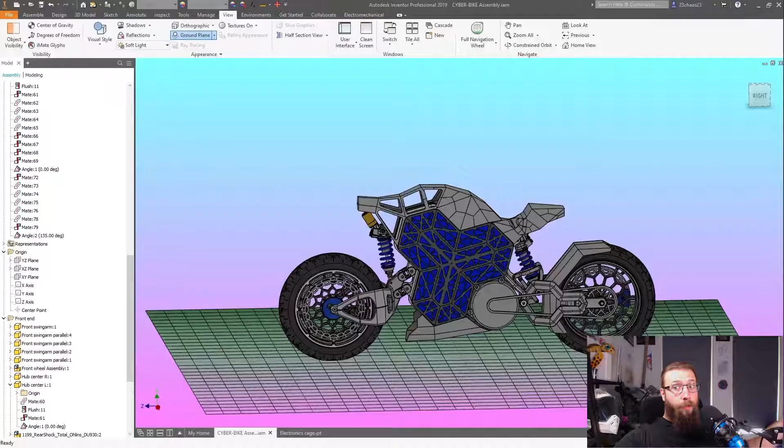So, voiceover time, but with face cam. Yeah, get yourself comfortable, I have. We're going to be here a while. This is a lot of footage to go through.

I'm doing this voiceover a little bit differently. Normally I do it inside of Premiere Pro - there's a little button where you push record voiceover, and it lets you record the voiceover over the footage. But because this is so long, and it's a bit awkward using the Premiere Pro voiceover tool, I'm just doing it this way. I've got the video playing in front of me on the big screen in VLC, and then I'm recording at the same time with the face cam.

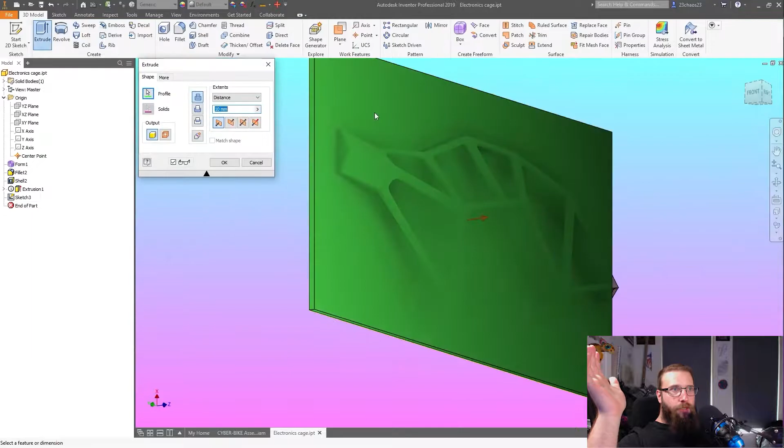We'll just go through it. This was start of last week, Monday I think. This was one of the live streams that I started. The weekend before, I was on hiatus basically for 2 weeks between the last episode and this episode, and then there was a week this last week where I was working.

Over the weekend, for the previous 2 weeks, I've been trying to work out where to take the bike aesthetically, and work some other stuff out with the steering geometry. That took 2 weeks basically, among other things.

Then over the weekend, I came up with an idea, and I created a new concept sketch for it with more detail, used my pens. Got a fancy new drawing desk there that my mum bought me for Christmas behind me, and that's a really nice drafting table, drawing desk type thing. So I put it to use, made a new concept art drawing.

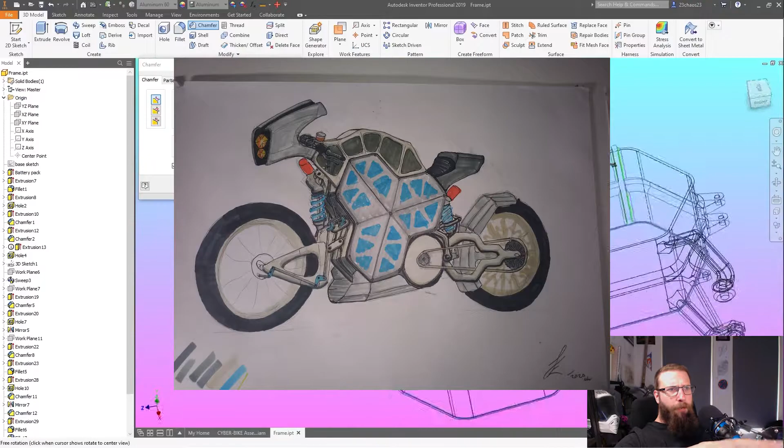You'll see it pop up somewhere in here - there'll be an image of it - and I'm just using that now as a reference for how I'm going to make this thing styled aesthetically.

So I've taken that form that I had over the frame as to represent the tank, and I've basically tessellated it. I've cut a whole bunch out, and now I've gone through the frame you just saw before, and created these bolting points around the top of the frame.

Now I'm just going to create the corresponding bolts in that tessellation. I'm calling it the electronics cage, because basically that whole section there, the tank section, is where all the electronics and motor control systems are going to be for the bike if you actually built it, because there's plenty of room in there.

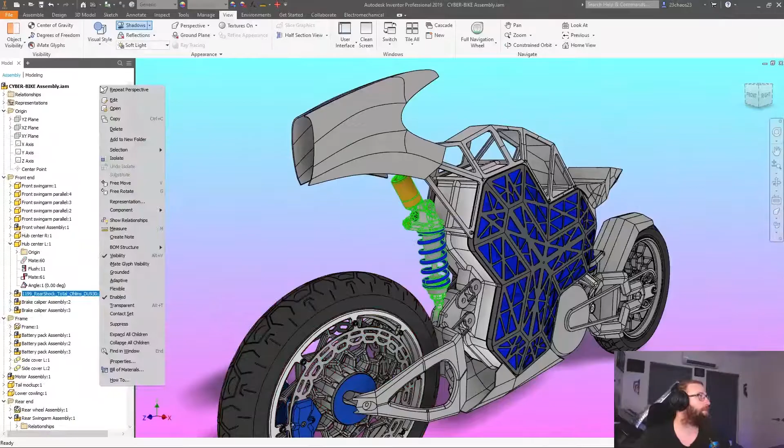This live streaming was fun. I really enjoyed this live streaming. It'll be nice when there's a few more people in the chat. At the moment, I've been sitting there for hours talking to myself, which is loads of fun.

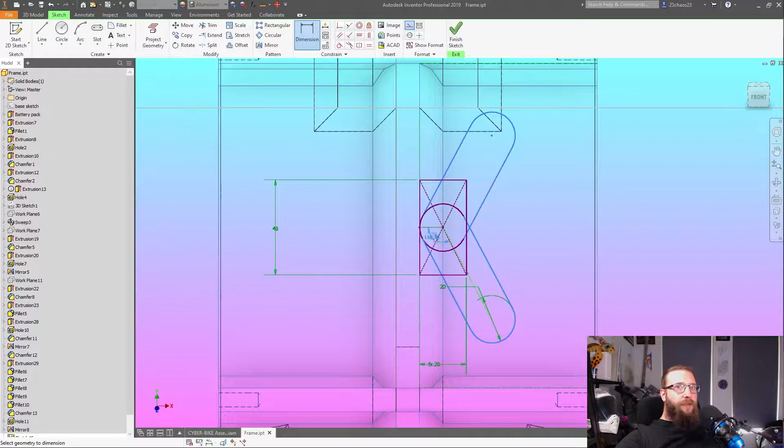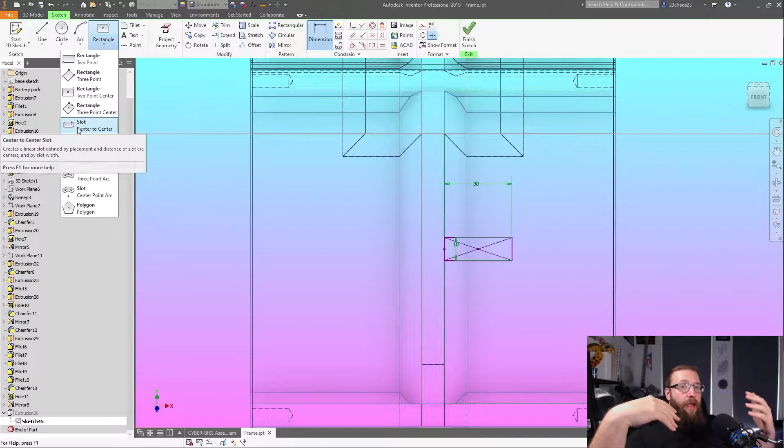What I'm doing here is creating the mounting point for the front suspension, the front shock strut. I need to create an area where the front suspension attaches to, and I don't want it attaching directly to the frame. Same as on the back of the bike, you don't want that sort of thing attaching directly to the frame. You want an intermediate part. If the bike is ever in an accident or a crash, it's easier to replace that section of connective material than it is to replace the entire bike frame.

On the back you've got all those extra linkages, and now on the front here there's an additional strut section so that if there's impact that forces through the strut of the shock, it doesn't apply those forces directly to the frame. There's an intermediate strut section, and that's what I'm creating here. This is the mounting point for it, and then we'll move on to creating that strut. This is it here.

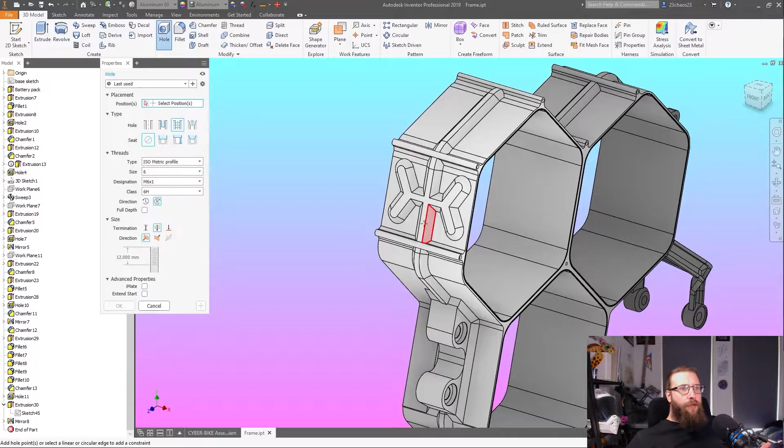Kept it nice and simple, playing around with different tools throughout this whole project, just trying to up my CAD design skills, playing with the different tools, seeing what shapes and designs I can make.

Here I'm using a lot of loft tools and generative design tools after working on the front swing arm. I found that for the rest of this it's going to be easier to use those generative design tools. And I said this in a previous video, don't use the generative design tools too much. You fall into the trap of not working that stuff out for yourself. But in this case I'm trying to work out ways to utilize it in creative ways.

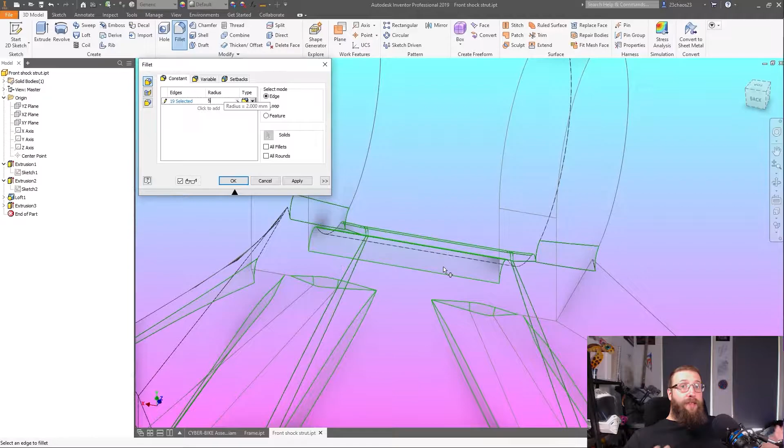So not just letting it determine what's happening, but using it as a tool, like it's intended to be used, and then using that to inform different options I had. I've already got ideas of how I want to do something in mind, and I'm using that to inform me on what the structural aspects of it will be and what directions I can and can't take. So that narrows down the choices I've made in my mind of what I want to do.

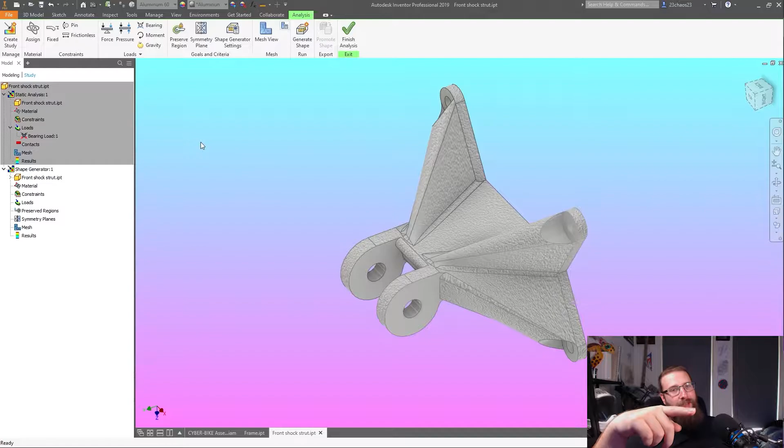You can see here, I'm just doing the stress analysis test. This is way overbuilt, this piece. I ran the stress analysis test before I hog out all the material in it. I'm putting over a ton of force into this thing, and it's not deforming. There's barely any stress deformation whatsoever.

It was a beast. So here you can see the generative tool saying, yeah, just hog all this shit out the middle, and there's going to be so much material taken out of it, and that's basically what I did. Come through here, I've adjusted the profile of the two mounting points, which is the mount to the shock and the mount to the frame, and changed the way the loft function works between those profiles.

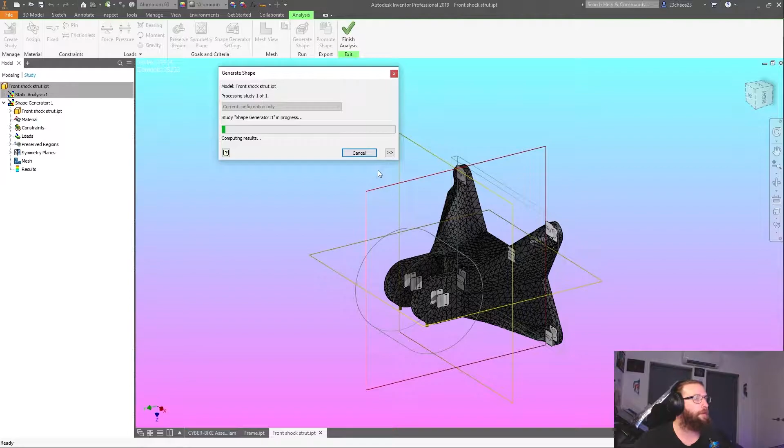See the quick turntable there, how much it actually told me to take off. I didn't want to go that extreme with the material removal, so I've included an extra strut there in the middle, as you'll see now, just to - I mean, it's still way over engineered. Like the amount of force this thing is capable of handling is nuts, because it's basically a 4-pointed triangular trestle.

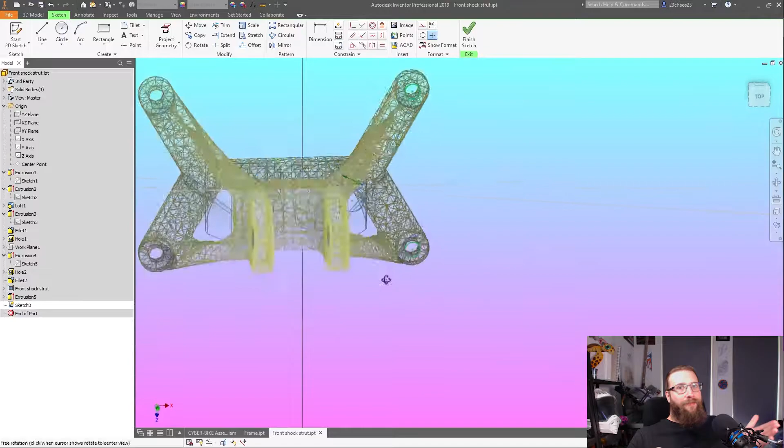They built the Eiffel Tower using a 4-point triangulated trestle system. They're fucking strong, okay? They build those guy wire towers with 4-pointed triangular trestle systems. They've got proper names, but I make up my own names for stuff because I'm a self-taught engineer. I didn't learn all the proper names, but I understand the concepts of how some of this stuff works.

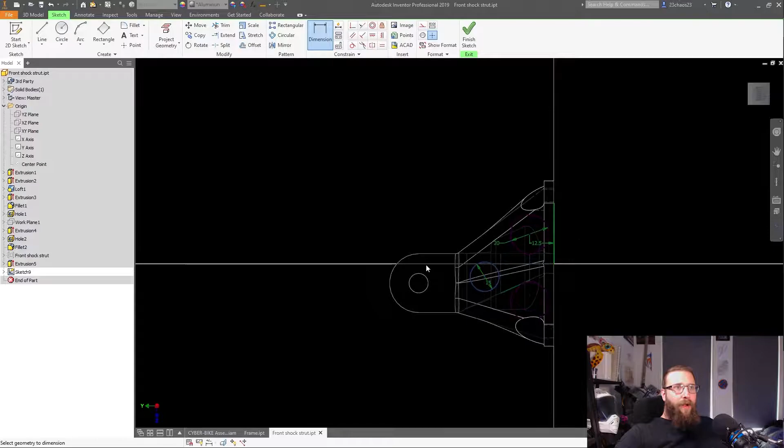So I've hogged out a bunch of material there, and I've just added these fillets in, and I'm not happy with it. This is one of the reasons why I don't like using the generative design tool, because it tells you this is the material you remove, and then you have to sit there and figure out how to CAD that material removal in, and quite often you end up with sharp edges or almost impossible to machine shapes. So practicality...

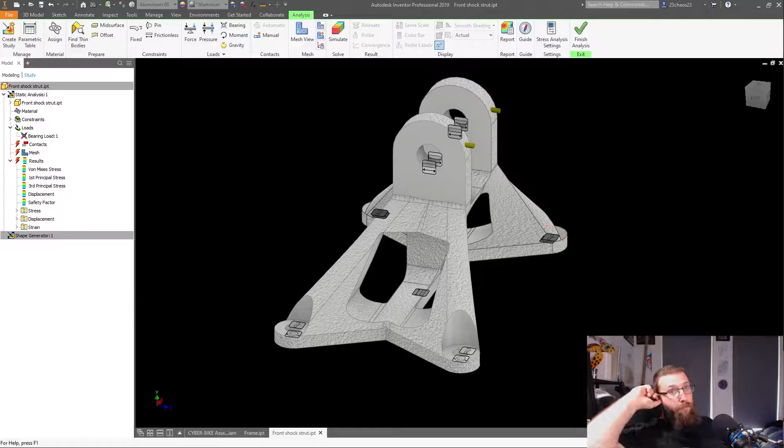Yeah, it's not something that's easy to make, and that's generally the problem you run into. I eventually found a happy medium between if it were manufactured - like it would be a cast piece and then it would be machined. So most of the parts on this bike I've designed so that it starts as a die cast part, and then there's some machining processes to remove material and to clean up reference faces and holes and stuff, threaded holes and stuff like that.

And just here, adjusting the overall position so that everything lines up nicely.

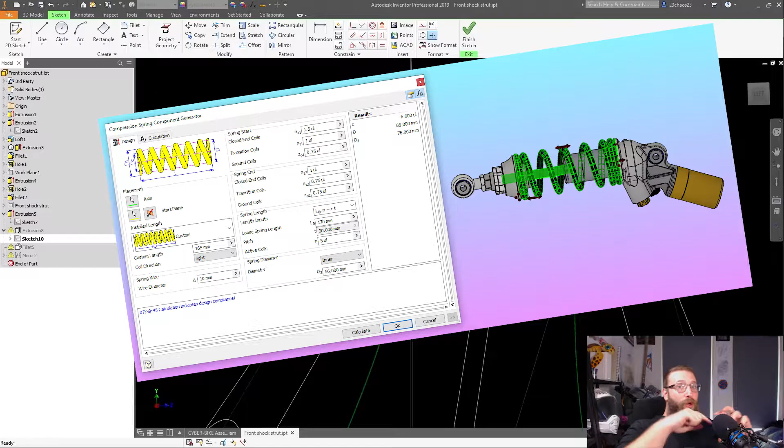Now, if you notice on the spring of the shock, the model I downloaded from GrabCAD has a graphical error in the spring profile, it's not filled in properly. I got fed up with this at some stage, so I went into that file, deleted the spring, and used the spring tool in CAD that lets you do generative design springs based on what forces you want, how much it's allowed to move, how many coils you want, how you want the ends to look, how thick you want your wire. There's all these options and you can tune it. I replaced the spring and it's a lot better now.

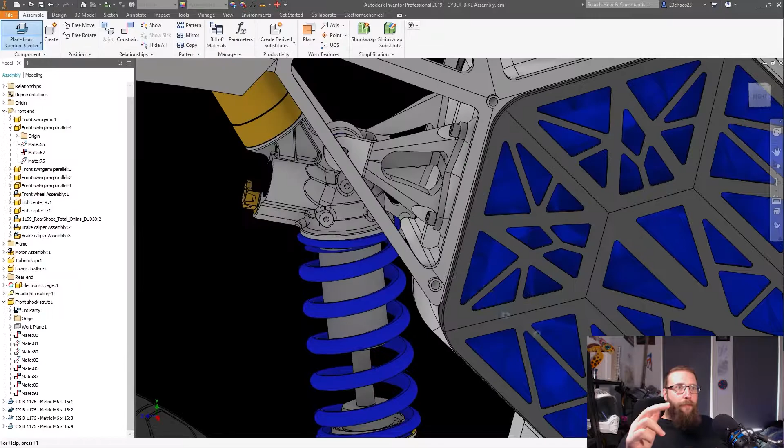I've got control over it now, so I can see what it looks like with the spring compressed. I just open up that dialog box and change the value of the length of the spring, and it updates the spring geometry and compresses the whole spring because I've got the surfaces mated to the geometry of the spring, so it automatically updates. That's really handy compared to before, when it was just a fixed model and I couldn't change anything.

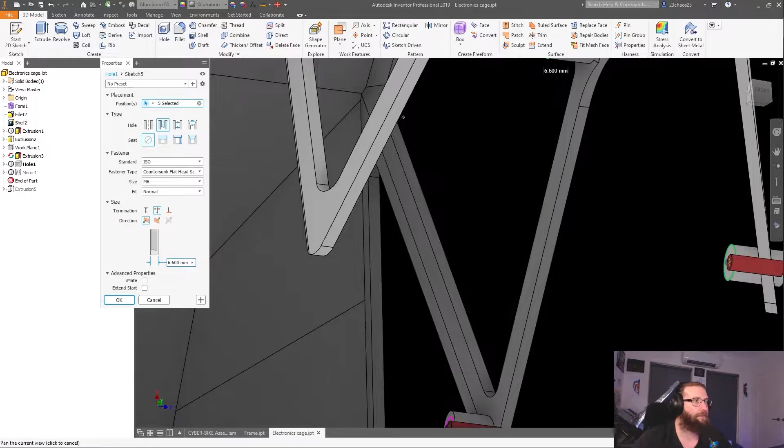You can see there I'm going through this list on the side. Quite often when I'm working, I'll look at the other options in drop-down menus, because you'll find a lot of information in there. One of the things I noticed was there was a screw option, a flathead cheese screw, I think it was.

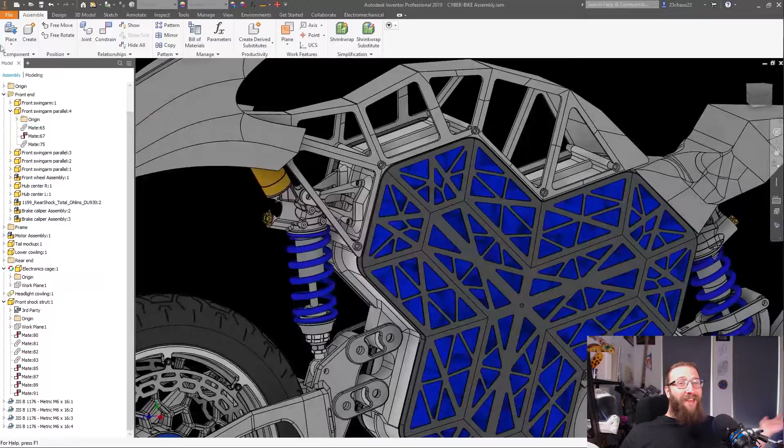It had the word cheese in it, and I was like, what the fuck screw is this? So I went and Googled it. Just a regular flathead screw fastener, flathead bolt, but apparently they call it a cheese screw. So yeah, I learned something new there. There's quite a few of those throughout the week that I've come across, where I'll be looking at a name of something in a drop-down box and I'm like, what the fuck is that? So I just bring up Google and look it up.

A lot of the stuff you do is like that. You just have to be curious. Don't just be focused on the thing you're doing. If you see something you don't know, you don't have to do this for everything, but while you're working and you spot something and go, oh, what is that, just be curious about it. Go look it up, take that like 20 seconds to look it up.

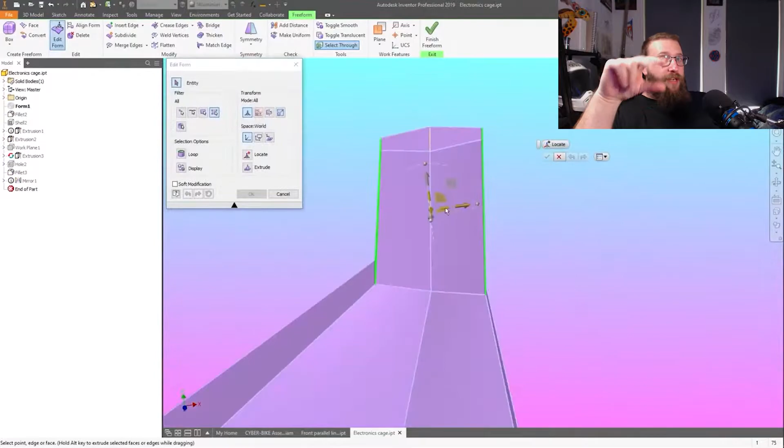So here I'm cleaning up the geometry I used to make the trestles, because I've changed the shape of the front end of the trestle, where I'm now going to start working on the headstock, which is basically the thing that the handlebars connect to. In order to do that, I had to change a couple of things and go back and update, and then update other things because the way I had it designed wasn't very good.

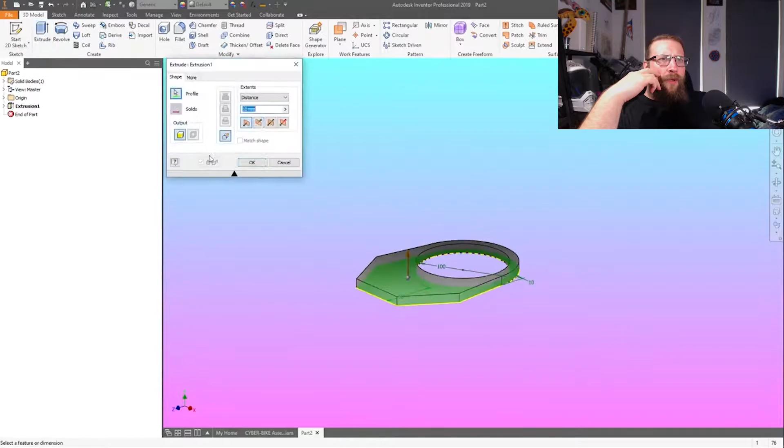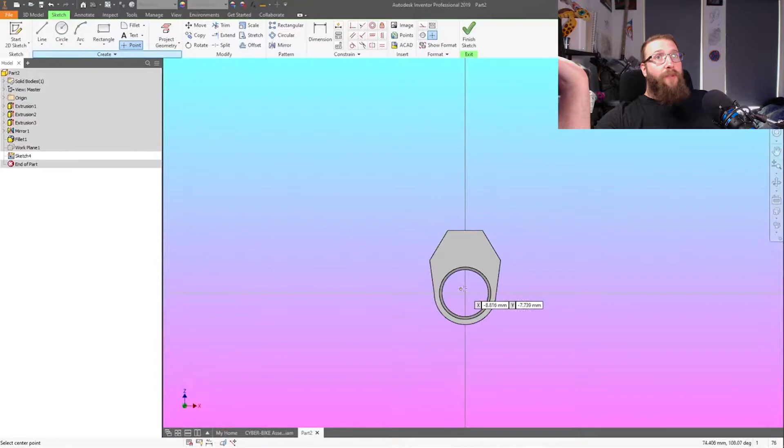Now I've moved the view of my face cam around, because in the live stream one of them I had it down the bottom, and then the other one, like this one, I had it up top. Don't ask me why I changed it. I think it was covering something up, and I wanted to not cover that thing up, so I had it up top for that live stream. Oh yeah, that's right, this live stream I think I was going to do some video editing on stream, and we never ended up doing that. Or was that this later one? It was a later one. I can't remember what the reason was, there was a reason for why that's up there, or why I'm up here now. I'm covering it up with this cat. Here, have a look at it. Yeah, see?

So all of this footage you're seeing is sped up by 15 times. I could go to 20, but it gets a little harder to track and follow what it is I'm doing on screen.

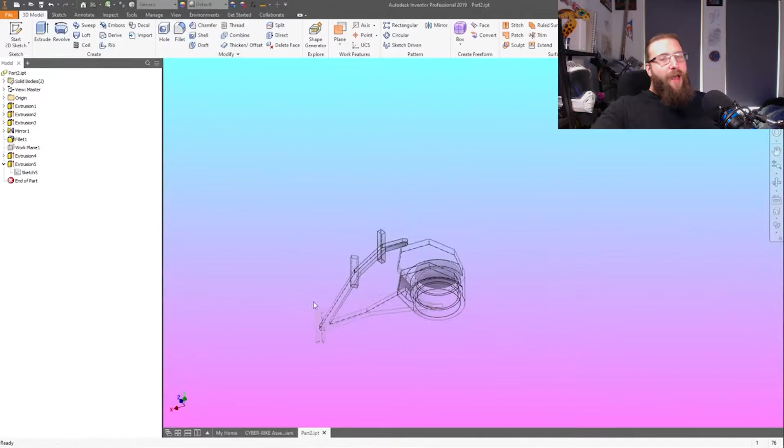15 I found is the maximum I can push this, because I work quite fast myself in real time. If you come watch the stream for a while and see how I work, I'm very snappy with it. It's like these FPS players, MOBA players, they've got this twitch reaction with their mouses. I don't play a lot of games, so this is my kung fu. This is where I get fast. This is where I get good.

To then go and do a time lapse on my footage, there's only a maximum limit of how much I can speed it up before it just becomes a blur of unrecognizable stuff. I'm working on the handlebars here.

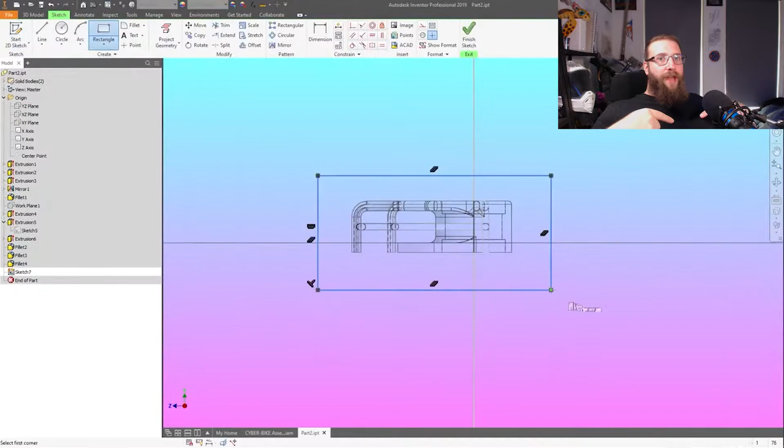Now this is one of the big things, how did I want the handlebars to look? There's very little functional constraint to it, because it's not like a regular motorcycle with shocks, where you've got actual forces of the front wheel traveling up through the shocks into the headstock and then into the frame. The handlebar on this is purely for the rider and for control of the steering. There's no actual proper force feedback coming back from the wheel. There is a bit from the steering geometry, but we don't have the amount of forces because we don't have suspension traveling through the handlebars.

So I wasn't as limited with the design constraints on this, so I was like, let's go a bit more aesthetic with this. And that's one of the things I did in that concept sketch, that drawing — I'll put a picture up here for you — to make something more aesthetic.

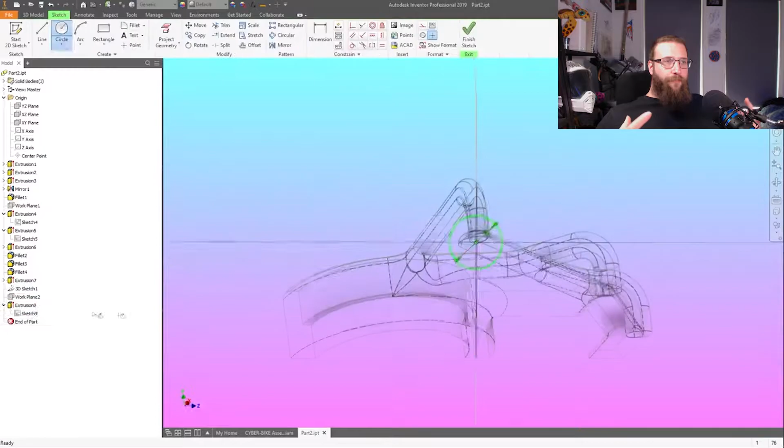It's only a very slight little part of the image where you see it. You have to look at it quite close, it's only a very small detail. But it was enough of a small detail for me to develop in my mind the full frame of the design from that seed. It blossomed into this whole idea, and it turned out really well. I quite like it, I'm quite happy with it.

It started out really chunky, it would have been like this. But I got it down to like this and still kept that sort of chunky feel to it. I wanted that whole cage sort of look on it, and it turned out really nice.

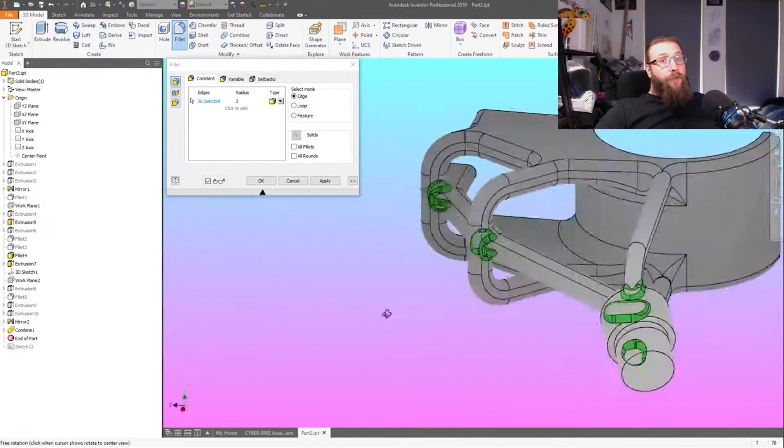I'm very happy with pretty much all of the work I've done on this bike so far. It's turned out really well, better than I expected. With most of the things that I sit and design, I always feel that pride in my work, and that's why I do it, because you have to have pride like a craftsman in what you do. You just got to find that passion and work with that passion to do what you're doing.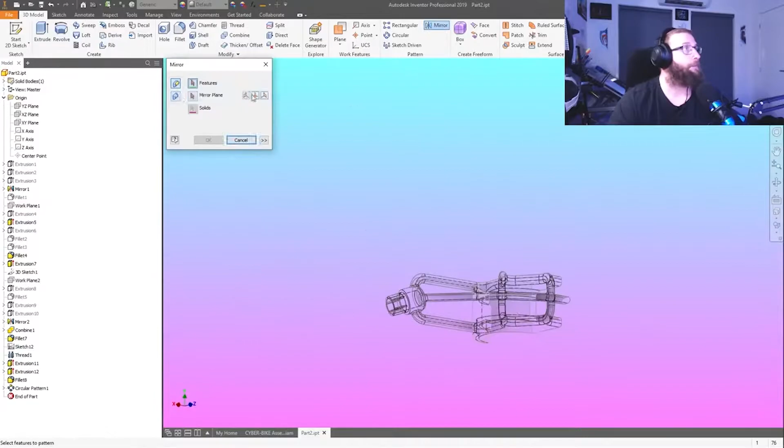You see here, look how fucking chunky it is. It's ridiculous. It's what happens when you're working in a window with something by itself and you're sort of freestyling what you're doing, and then you pull it into the rest of the assembly with everything else. You go, oh shit, I wasn't paying attention to my sizes and my dimensions. It's a bit like, ooh, I should change that.

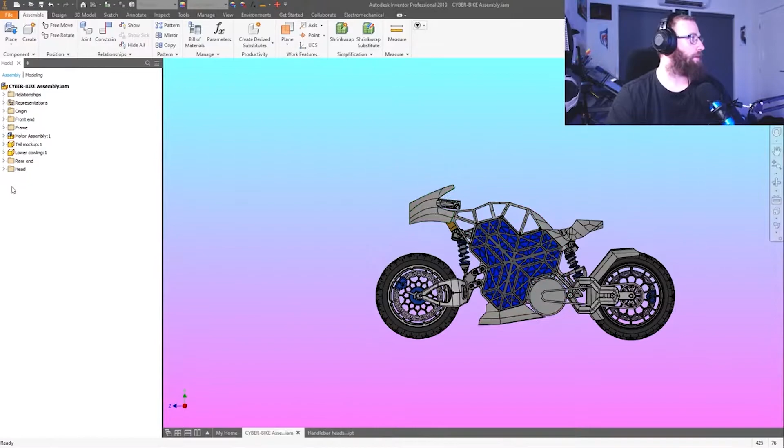There, see there? I'm adjusting the spring size. Surprised I didn't get footage of me actually doing that, changing that spring out. But the new spring looks good, much better than the old spring. Spin me right around, yeah.

And then I had to go back and change something here again, update stuff. I had to fiddle with that electronics cage quite a few times, it kept giving me grief. I spent quite a bit of time here just fixing stuff, getting it to fit nicely, especially for the headstock and the way that it all attached to everything.

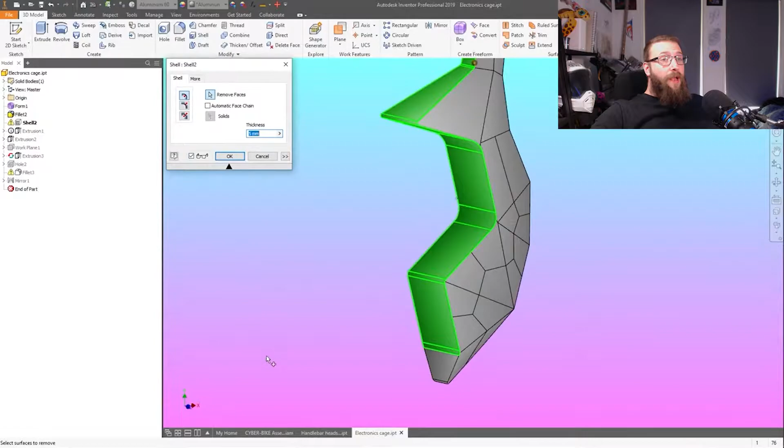I saw a lot more new people showing up just to see what was going on. I think YouTube has a different algorithm for showing up on people's feeds, for lives, like people looking at what's live — I think it's got a higher chance of showing up for people. So I'm going to do that more often. I see a lot more traffic into that. I mean, they don't all stay, they're there for like a few minutes to see what the hell's going on. And there's just this weird guy sitting there talking to himself because there's nobody else watching. There's like 1 viewer count, 2 viewer count.

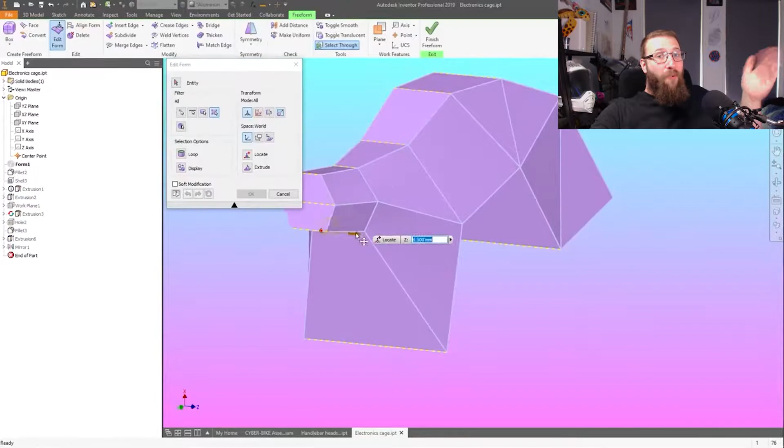I'm quite happy to sit there by myself and talk to myself for 3-4 hours. I did one stream that was almost 9 hours with a break in the middle somewhere. Whew, that was a long day. That's why this whole video is so long.

This is the final episode of the Cyberbike. I can't believe it, a complete project. This is a first on the Chaos YouTube channel. I don't think I've ever completed anything on this channel. There used to be a lot more videos here, but I've unlisted them because they were proper garbage.

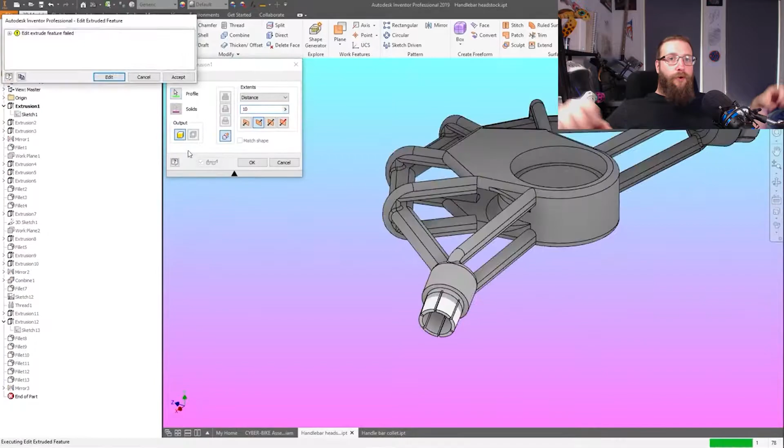I decided to go with a collet chuck type deal for the handlebars. So the handlebar comes to a certain point, and then there's a pipe that you pop into it and tighten it down, and your grip, controls and everything go onto that pipe. So if you drop the bike and bend or damage the ends of the bars, you don't have to replace the whole assembly, just the ends.

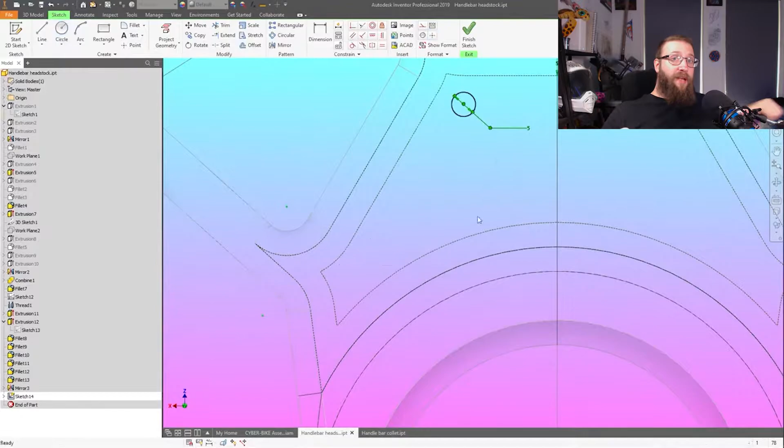This is another design feature that's quite common in some bikes. Most bikes actually just have a pipe as a separate part - you can drop the bike, that bends, and you just replace that side of the handlebars. Dirt bikes are a bit different, but most of the stuff on a dirt bike is designed to come off easily and be replaced easily.

The whole handlebar section on a dirt bike is cheap - I bought one for my dirt bike once and it was like $16. They're so cheap, and then all the parts that go onto them are designed so that when there's a crash, they rotate around the bar and push out of the way so they don't actually damage or bend. It's just your grips, the brake levers - yeah, those things.

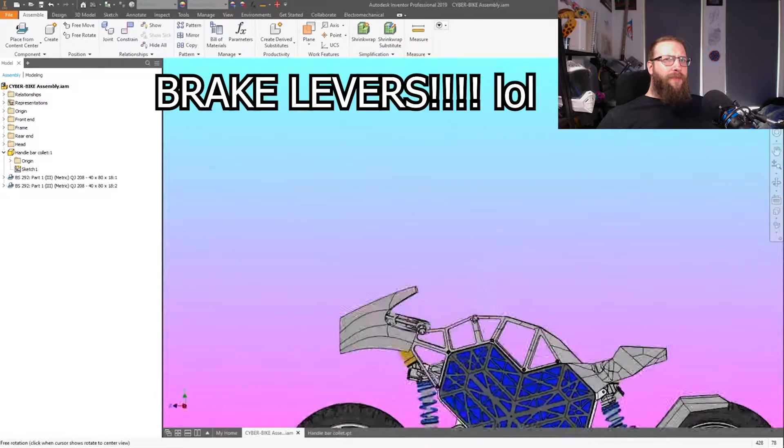So I'm just designing up the collet that goes on there to tighten those tines up. I was quite happy with the way this turned out - I just sort of freestyled it. This whole handlebar segment, just on stream, all in one go, freestyled it. I didn't have any proper drawings or anything, it was all just ideas in my head. See how it turns out, play around with it - yeah, it was a lot of fun.

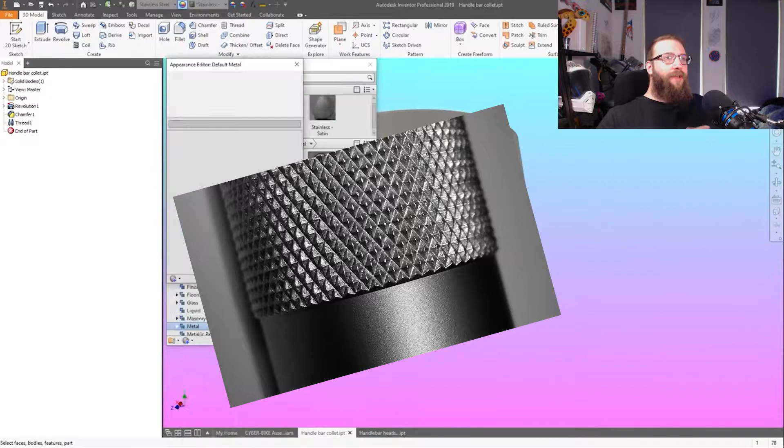This was interesting - I knew the Autodesk Materials Library has a knurled pattern, like you get knurling on stuff, and I put it on there but the pattern was huge. So I had to duplicate the texture and change the scaling of it so that when applied it looked good. I work in technical sketch illustration most of the time, so I'm not sure why I bother applying realistic textures to things - I suppose it's for the beauty shots or close-ups, when you turn on realistic rendering you get to see all the different texture profiles.

Oh, that was another thing - when did we miss that? I don't think I recorded that.

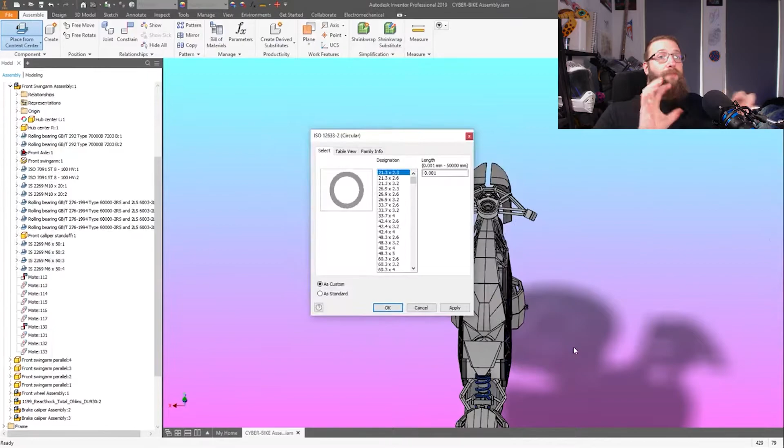I remade the front axle that goes in the hub-centered steering, and instead of making it all as one piece like the previous one, I decided to play around with the welding tools in Autodesk Inventor. You can create an assembly file that is a weldment file, assemble your individual parts like normal, but then almost like in a regular part file you add the fillets for the welds and put in all the information - what kind of weld it is, how deep the bead is, whether it's a penetrating weld or just cosmetic - there's all those features you can add.

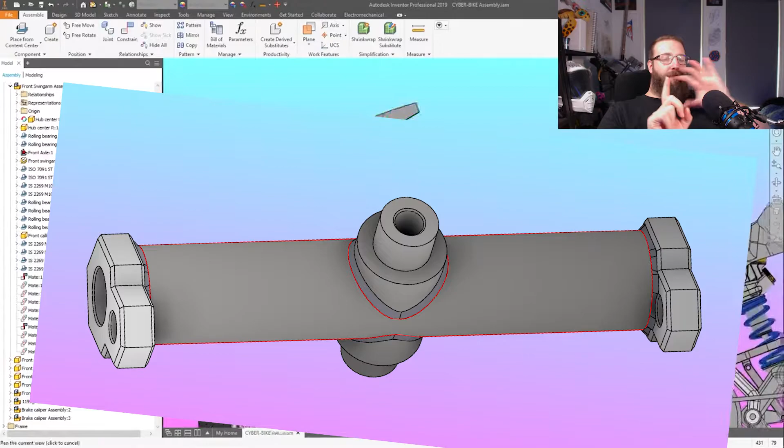So I created the whole axle section - basically the headstock for the rake angle is a solid cylinder with threading on top and bottom to capture the bearings, and then there's a hollow pipe with a cutout through the middle that the cylinder pops into, with welds around the top and bottom. On the ends I made two machined steel end caps that fit into the swing arm - you pop them in and put a weld bead around those.

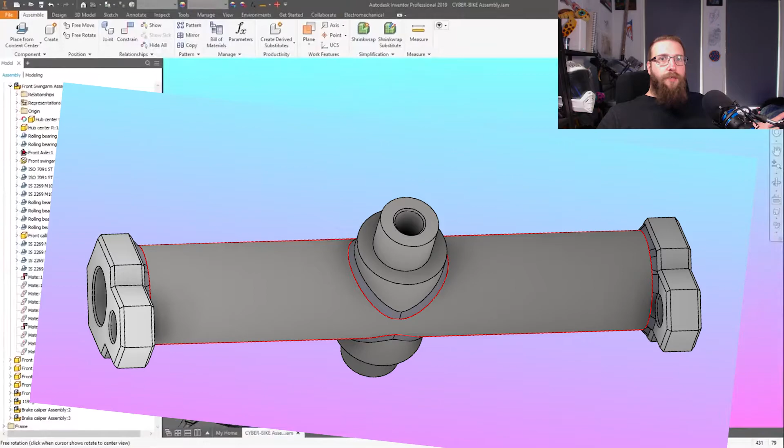And it turned out really, really nice. I just keep saying everything in this looks nice, but it's not unbiased, I'm sure - though it did turn out nice, I'm sure most of you can agree. If you're still here watching, good on you, I'm just waffling on.

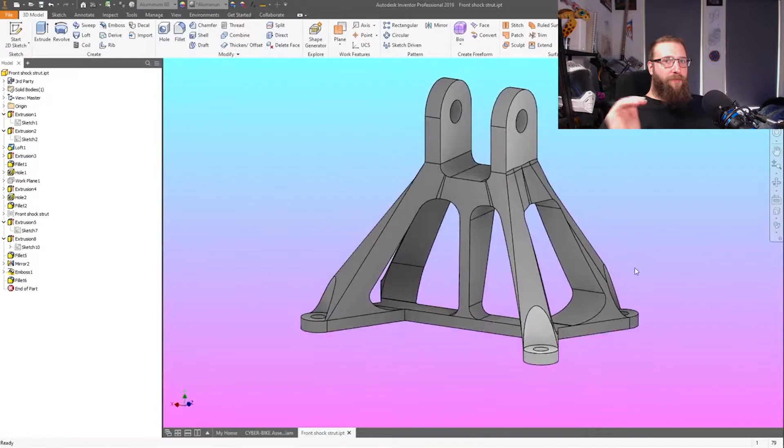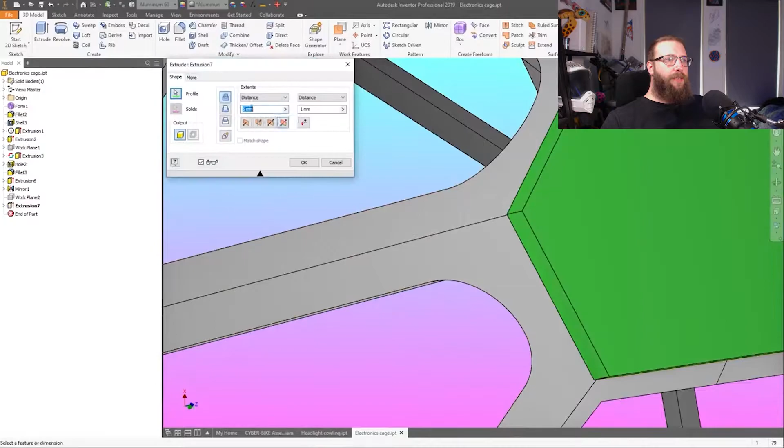Alright, so here we go. Now we're going to make the headstock, so this is going to attach to the electronics cage. I'm eyeing this up, because how much strength did the electronics cage have to hold up the headstock for the handlebar for the rider? I wasn't sure, but it's all 5mm cast aluminum.

It's more than strong enough to hold somebody leaning on the handlebars, especially the way the trestle geometry is shaped and attaches to the frame - not a problem. I can come back and do stress analysis at some point and show you guys, but trust me, it's fine.

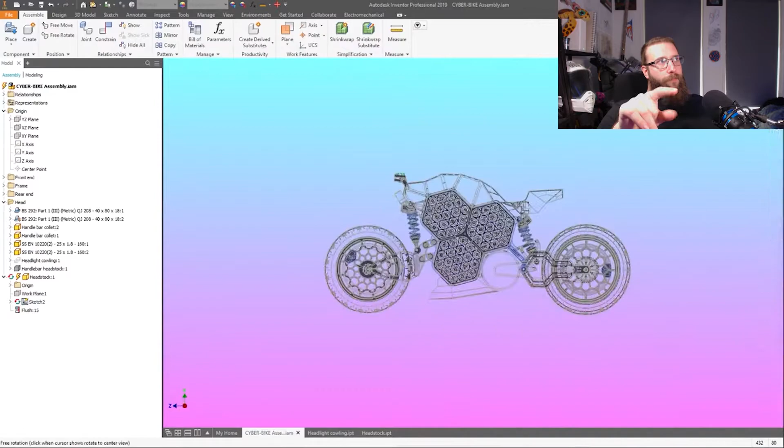I'm just using an adaptive sketch here, using projected geometry from the handlebar and projected geometry from the electronics cage to create the angle and shape, and then I was just going to make it - yeah, it came out alright. I could have fiddled with it for another few hours, but it was good enough, it got the job done.

It's only a small part, it's mostly hidden, it's out of the way. What more do you need? It's a basic part - it holds the handlebars on, it's got one job to do.

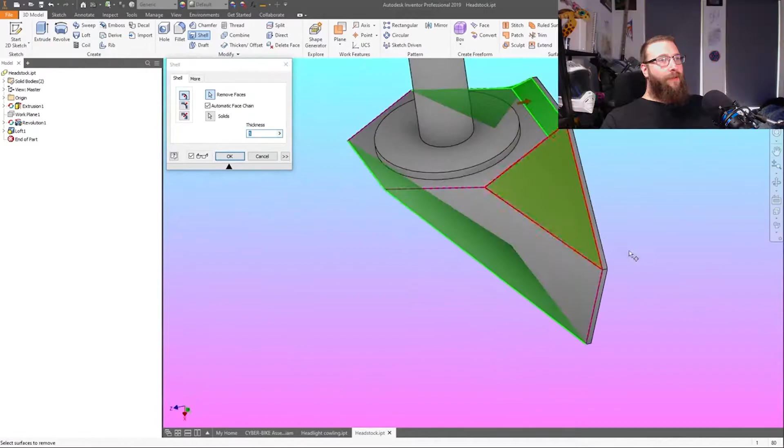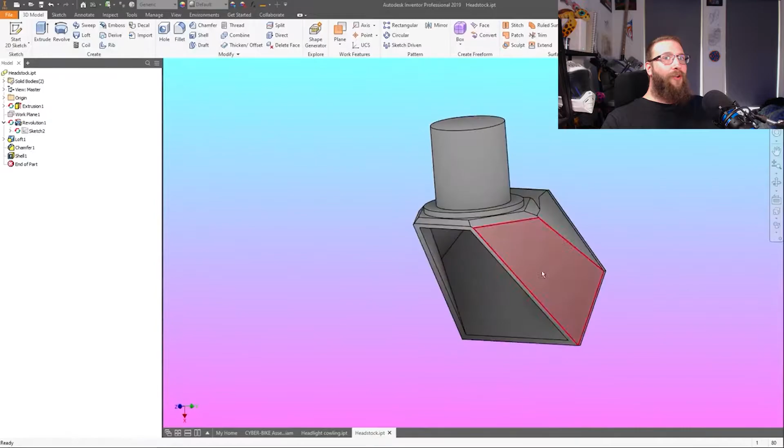It's amazing what you can get away with the loft tool, I swear to God, the loft tool eh? I try not to use it for everything, because I could probably use it for everything and everything would look like lofted garbage. If you want something to look good with the loft tool, you have to put the time and effort in to put multiple sketch frames in to loft the shapes better. Because if you just tell it to go from point A to point B, it's going to look like lofted garbage, and nobody likes lofted garbage.

Alright, finally constraining and attaching the handlebars to the frame. Everything is now officially connected.

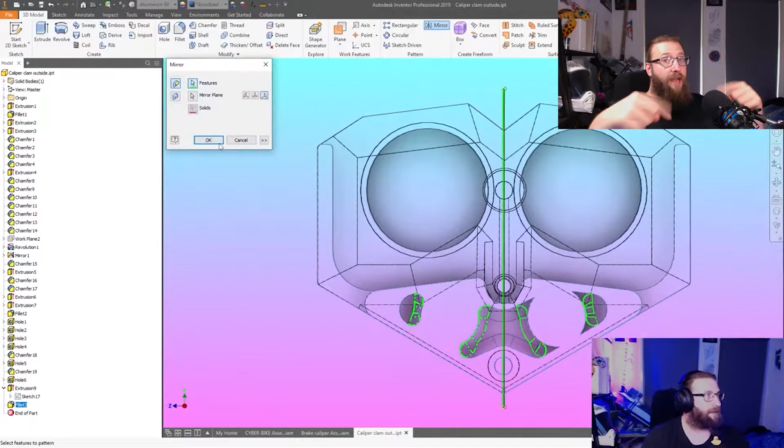I also made the axles - not axles, but I think they'd be gudgeon pins? No, not gudgeon pins, I'm not sure what the proper name is - the name for the pins, the bars that go on the front end parallelogram suspension system. Before they were just constrained, but I've actually got axles in there now with holes for bolts and everything, so that's all done.

Modifying the brake calipers here, because I need to make the bolt mounting holes, and I needed some more meat in the back end of it to put the hole for the threaded bolts that are going to hold the caliper to the thing that holds it to the swing arm. This whole project has been a whole bit of, the leg bone's connected to the knee bone - I don't know, you get what I'm saying.

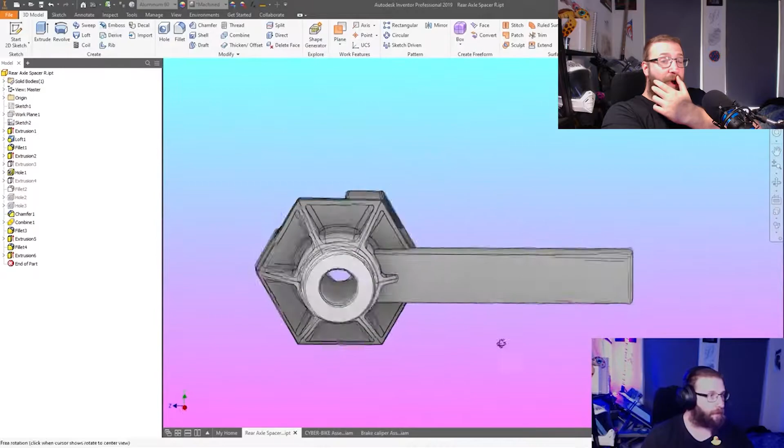So I'm making the rear caliper strut, which is off the rear spacer. Whether that's a good idea or not, I don't know, but it made more sense to do it like this and attach it this way than to create another part off the swing arm, because then it would have to go past the axle nut, around it, and all the way to the back to where the caliper is. So it made more sense to make it off the spacing nut, given the side-to-side face spacing between the central axis of the bike, the caliper, and the swing arm - the way everything is spaced out. It made more sense to come off that spacer.

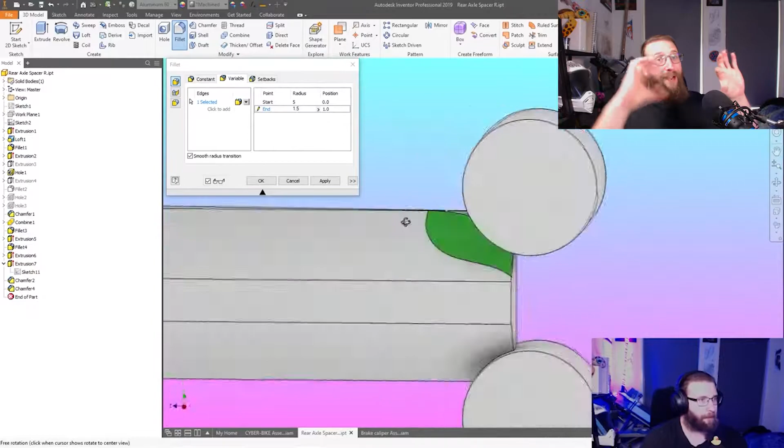The whole way through making this thing, I just made a stick with two balls on it, and I'm like, oh my God, this looks terrible. This is on stream, like, yeah, this is fine, this is normal, this is okay, nothing to see here. This is engineering, this is what we do, like - oh it's so bad, it's so bad. It turned out okay though, I did some tricky things with fillets and chamfers, and it did turn out okay. It still kind of looks like what it looks like.

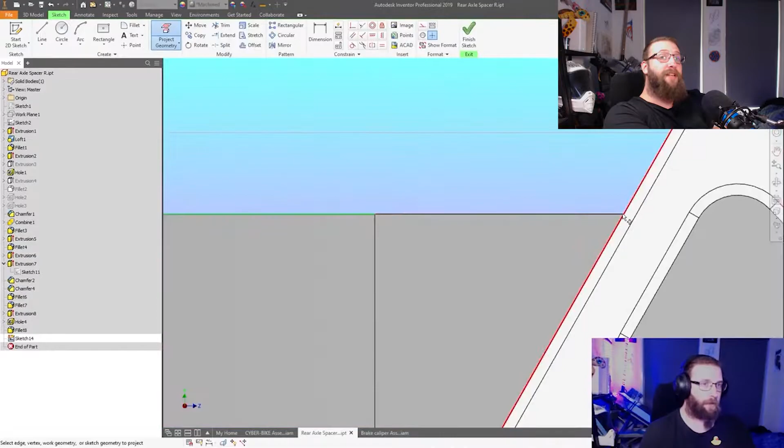It's minimalist, okay? It's very minimalist. It is exactly what you need to get the job done. The braking forces from the rear calipers aren't as much as what you'd find on the front calipers, so it's basically made to work.

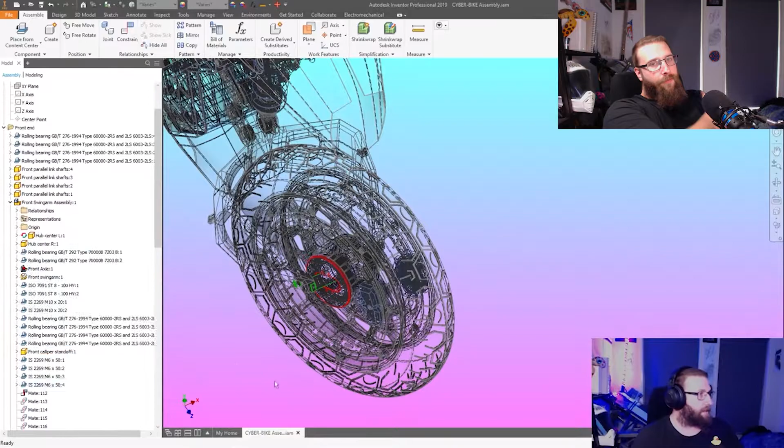Now, what's happening here? This was fun. When I redid the axle for the hub-centered steering, I created the whole hub-centered steering assembly - the hubs, the axle, the swing arms - all in its own assembly file. So now I'm coming in here wanting to work on the steering geometry from the hub center up to the handlebars, but I can't do it because the hubs are inside a lower assembly file, a parent-child file assembly.

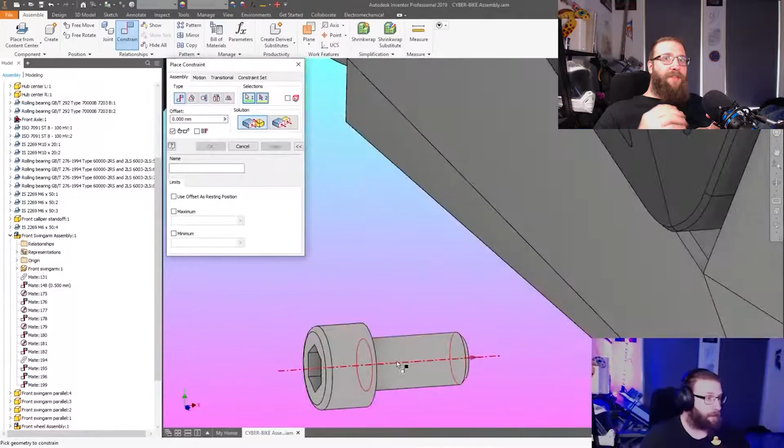You can't manipulate things and move them around the constraints when they're in a child directory. So I had to remove everything from that hub-centered steering assembly out and into the main assembly I'm working on, but still kept them in these folders on the side here, because the list of parts for this assembly is large. When I moved everything out, all the constraints broke, so I had to go in and reassign what each part was attached to. It just takes forever, especially this far into the project with so many things.

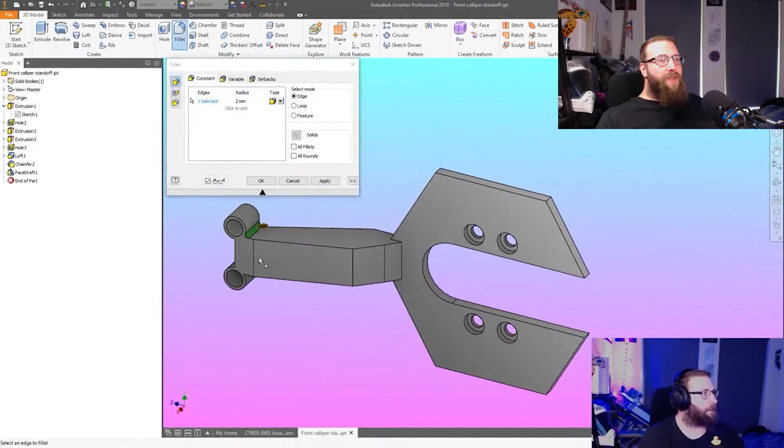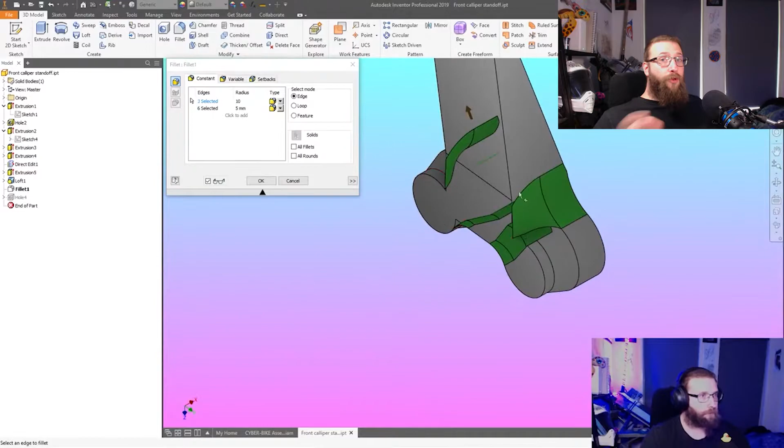We have achieved completion on this project, so it's not so much to worry about. Another big reason for finishing this project now is the file is starting to chug. I'm getting a lot of performance loss working in the file, zooming in on things to constrain stuff, any kind of work or manipulation on the parts. It's not so much a performance issue of the machine - I think it's a software issue in Inventor itself when you get to these large assembly files, because it has to go through and update lists and stuff. I think it's probably where I've got things constrained and assembled in the assembly file - I'm not doing something completely right, I'm pretty sure.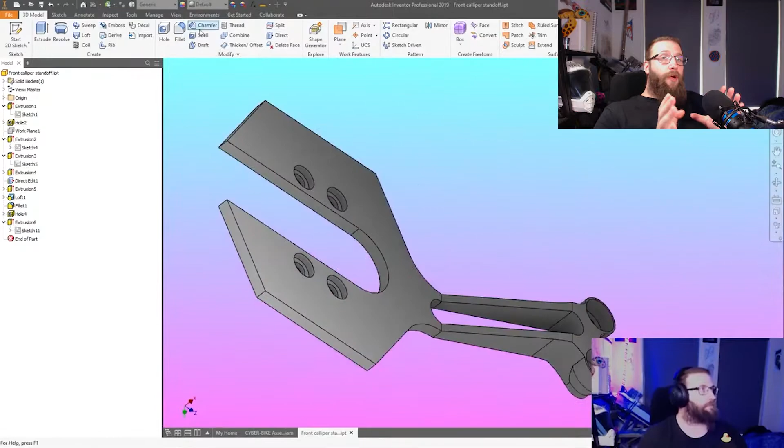So it's just becoming more difficult to manage and work on the assembly at this stage, so it's a good idea to move on to something else. You'll see whenever I'm working on something, I pull it off into a separate window and work on it by itself, because working on it in the assembly with everything else isn't possible - there's too much lag. So here we're doing the same thing we did for the rear: making the struts that hold the calipers. These are also going to double as the mounting points for the steering geometry, so the push rods that do the steering come off the sides of this.

These are a little bit more beefy because there's a lot more braking forces, since you use your front brakes a lot more on a bike than you do your rear brake.

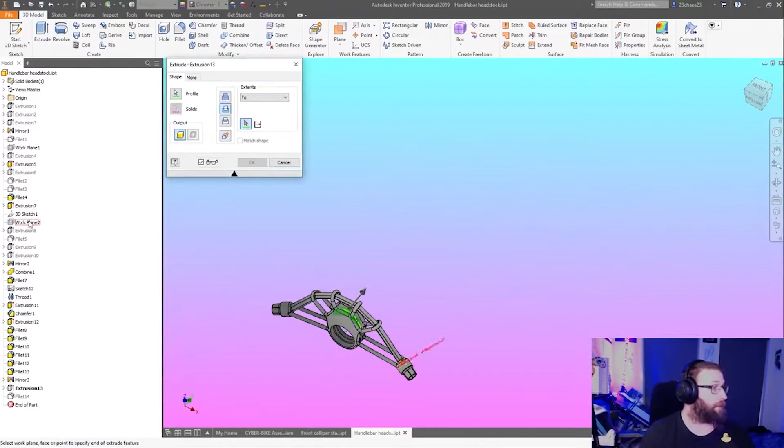Coming here, making some alterations to the handlebars because I need to create some drop-down tabs to put a hinge assembly in with a linkage that drops down for the steering.

And this was so simple - like, I didn't want to come this route. I wanted to have linkages that came off the back of the handlebar, inside of the electronics cage, came down beside the shock, all the way down to the parallelogram, across the parallelogram, around the swing arm, and then to the front. Like, it's too complicated.

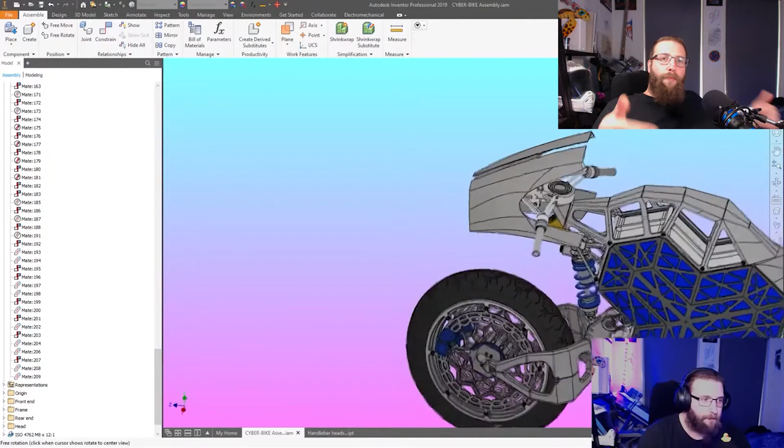It's doable, but you're going to get a lot of backlash through all of those connections, and managing the levers and the pivots and the push rods all the way up to maintain that when you turn the handlebar a certain amount, you turn the wheel a certain amount, becomes more and more difficult. You have to manage the length of each of those levers that connect to the push rods, translating the forces from the handlebar at the top going like this, then down to the bottom going up and down like this, then outward from the swing arm to the side, then inward back to the hub, then pushing forwards and backwards on the hub. I was like, you know what, screw it.

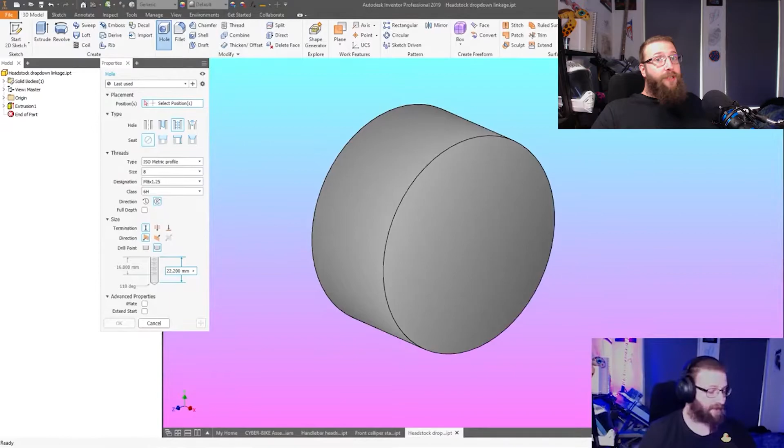I'm just going to drop a linkage down from the handlebars that comes in front of the shock, and then two linkages that go out to the sides. Space them out enough so that when you turn, they don't interfere with the tire. And it worked out beautifully. It came out really nice. I was super happy with it.

I've got some more footage at the end here, because this was the last day of streaming last week, and it doesn't look like this anymore. You'll see it just now when it's finished. I made it basic, plain and simple.

I wanted to first validate the idea in my head that these linkages would work in this way, and wouldn't bind or interfere with the tire or stuff like that, and it would still work with the suspension when the suspension operates.

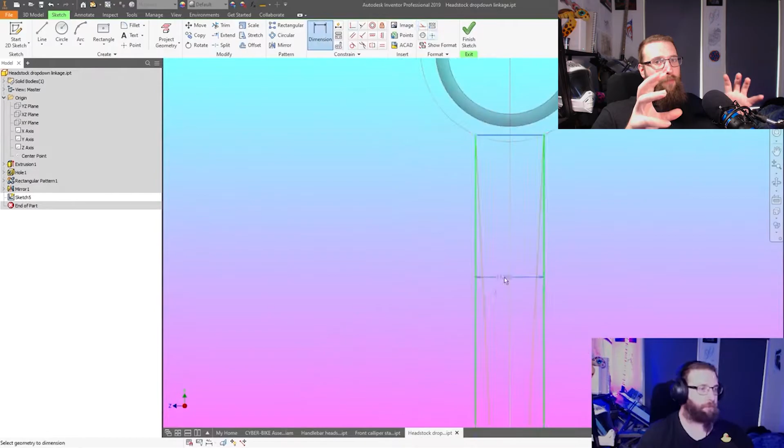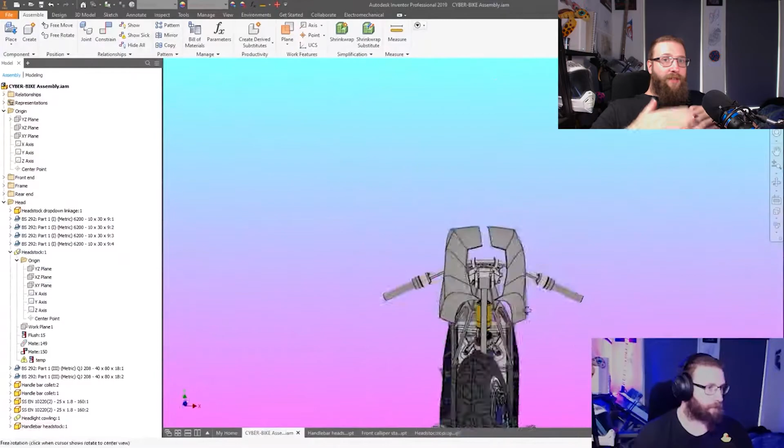So I just mocked up the first linkage, and then the second linkage, the linkages on the side. I created these ball joints previously and just attached them in. I didn't even create the bar that goes between the ball joints. I just used a constraint and pushed the constraint measurement, measured the distance from point A to point B, and then constrained the face of one ball joint to the other around the circular constraint, so that they didn't move closer or further away, and they didn't change their axial orientation from each other, so they stayed locked to each other.

As if there was a bar there. That's just a quick trick you can do when prototyping stuff, so you don't have to spend all the time making the geometry before you need to validate that the thing is going to work. Especially when making complex mechanical stuff like this, you need to validate that it works before you spend the time and energy making the thing, only for it to not be useful.

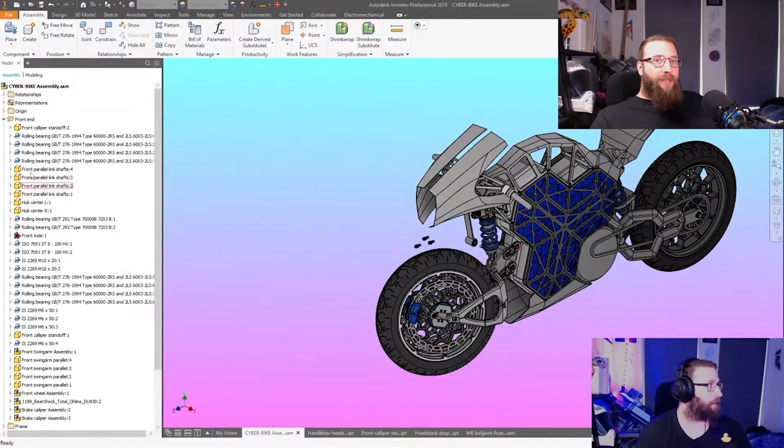So yeah, I'm attaching these ball joints, and again, made the ball joints with the ball all in its own assembly. But when you bring it in here, you can't have that ball moving inside that assembly on this assembly. So I removed the ball from that small assembly, put the ball in this assembly, and then just attached that assembly to the ball so that it would still rotate around the ball.

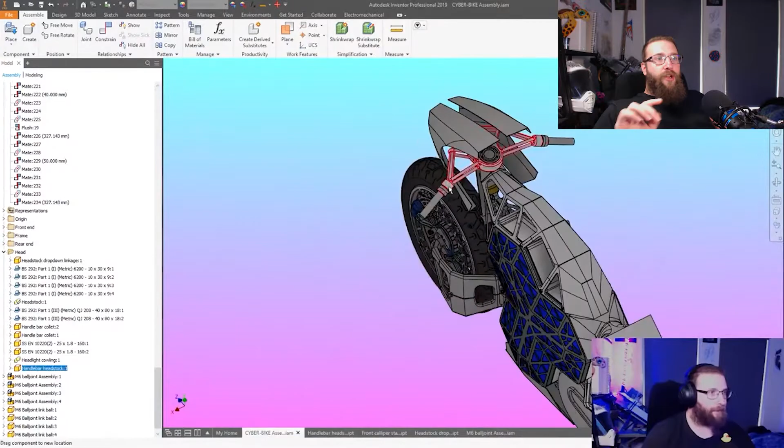There, you can see I've attached one to the hub and one to that linkage dropping down from the handlebars. Now I've only got one on the one side, and I tried turning the handlebars and it didn't work. Of course it won't work, because you're only pushing on the one side. If you turn that, it's just going to move away from wherever the linkage is. It'll twitch the wheel a bit, but it won't actually turn it. So you need to put the other one on the other side. That creates a perpendicular frame constraint, because you've got a fixed frame at the bottom and a fixed frame at the top.

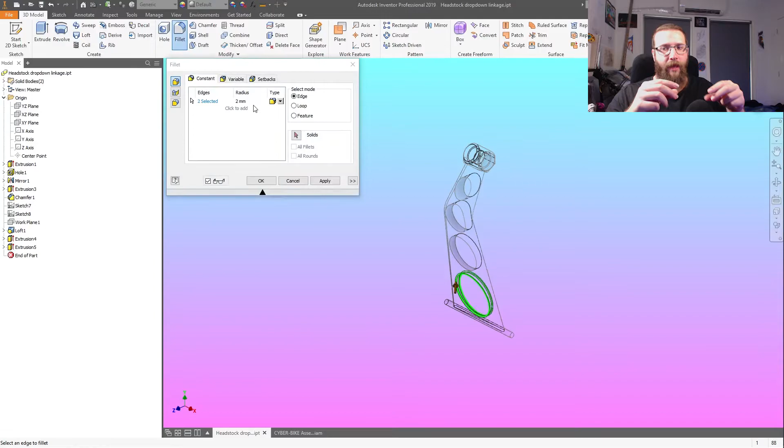And then that was basically all that I got done for those streams. Then this section, after creating those constraints and validating that the push rod system would work, I came in later and cleaned up the linkage and made it look pretty. This was all done off stream. I did it this morning, took me less than an hour's work, just to clean it up, make it pretty, and extend the bottom section where the push rods join up to. And yeah, that's it, it's all done.

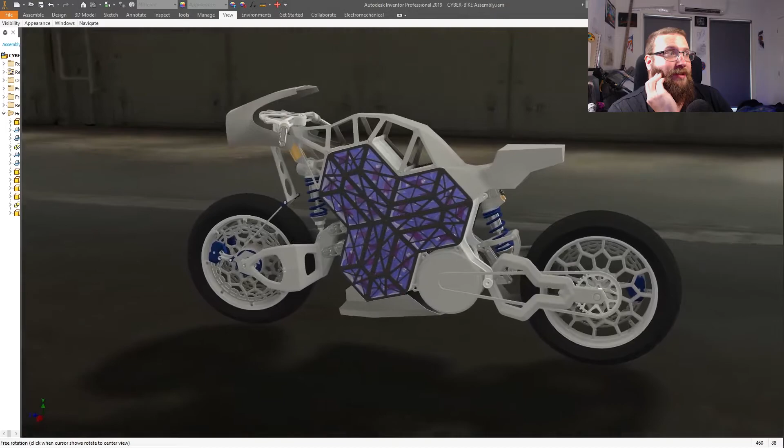That's all of it. And we're gonna get into the next project in the next episode, and that's gonna be interesting, for a number of reasons, because as some of you that have been following along on the stream have heard, the next project is going to be an RC airplane, a bush plane, a short takeoff and landing plane. We'll get into the details of that in the first episode of the next series, which is going to be the Draco bush plane.